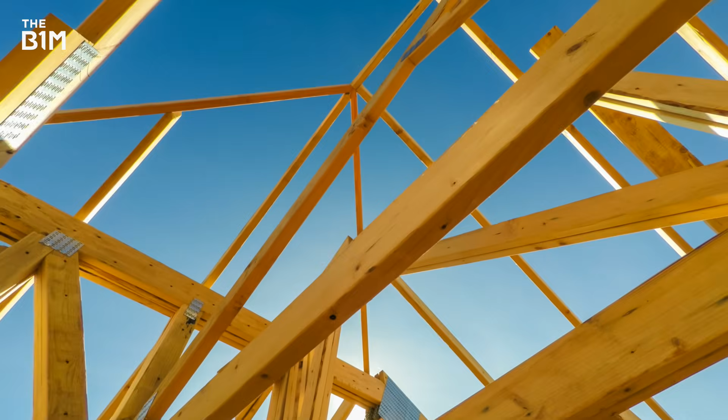Thousands of years after it was first used for building, timber has evolved into one of the world's most versatile construction materials. From soaring towers to Olympic venues, the boundaries for what's now possible with wooden structures are being constantly redrawn, and the trend shows no signs of slowing.

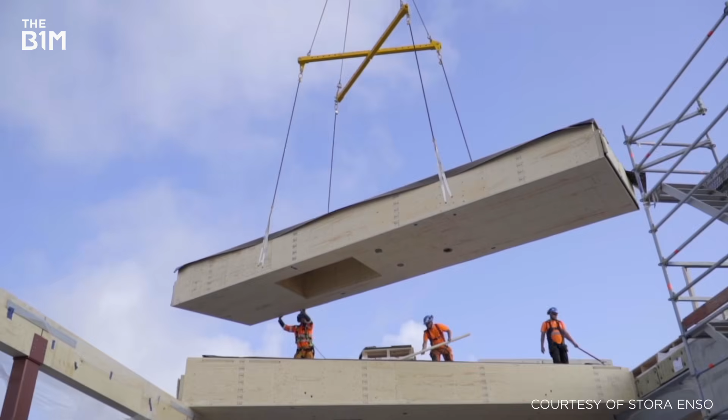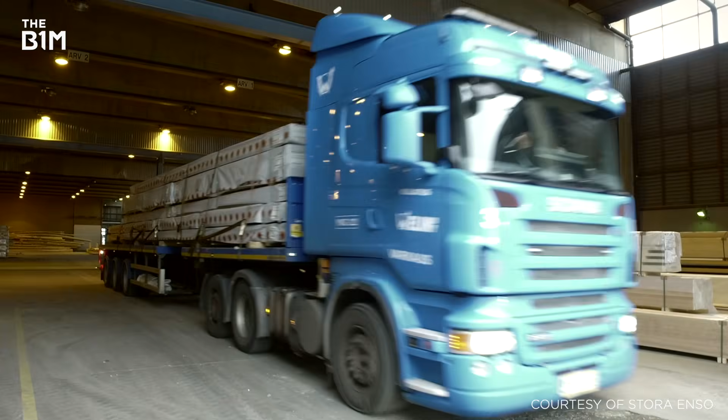But one team in Finland has taken things to a different level. Drawn by the material's benefits and backed by cutting-edge technology from Solibri that enables them to de-risk the project and get right first-time wooden elements from the factory to site, they're now building a new district of Helsinki in timber, and quite literally taking wooden construction in the country's capital to new heights.

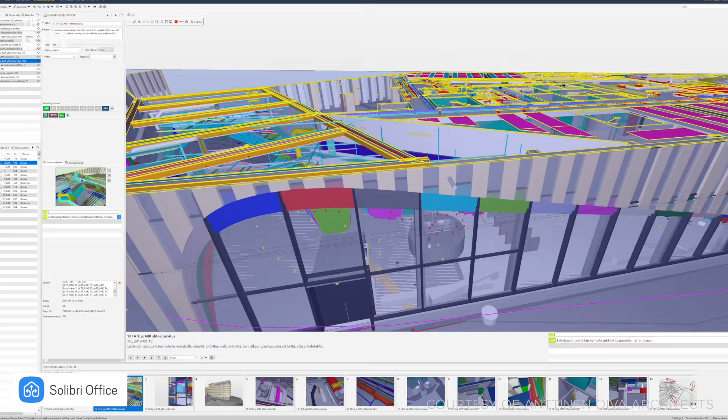With almost 3/4 of its land covered by forest, Finland's long tradition of building with timber dates back to the 16th century. While this was largely limited to housing, a recent relaxing of regulations around multi-storey wooden structures, along with new innovations in wood manufacturing and digital technology, has made building tall with timber an irresistible prospect for developers.

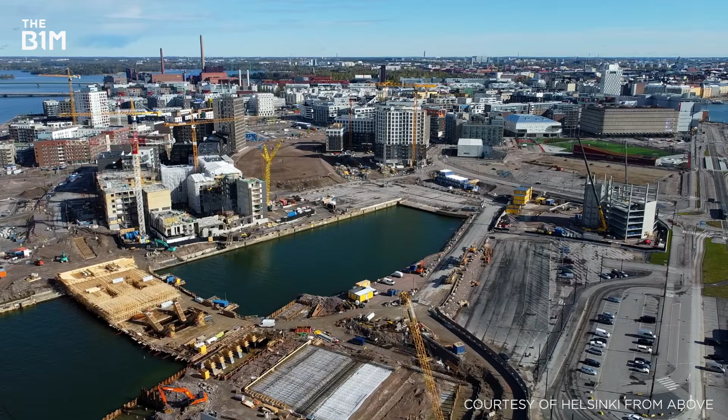Those changes, combined with high demand for workplaces and apartments in Helsinki, have given rise to Wood City, a new district on one of the city's former container ports that is being formed almost entirely with timber. As part of the redeveloped Jätkäsaari quarter that is set to house 17,000 residents and create 6,000 jobs, Wood City combines Finnish wood construction with sustainable design.

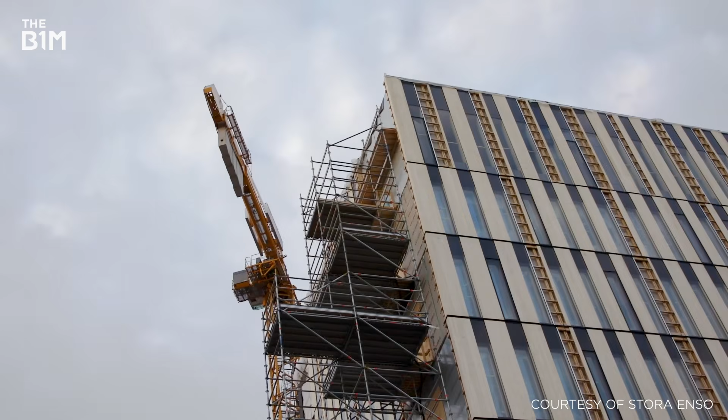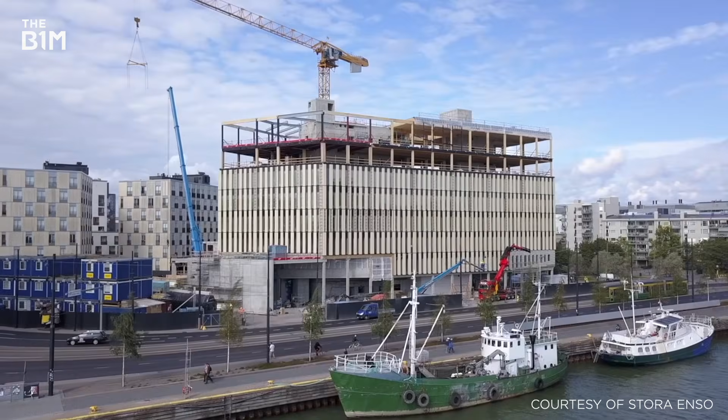Its first structures, twin affordable apartments for the Helsinki Housing Production Department ATT, are already built and inhabited. Next to complete is a new office block for the gaming company Supercell, followed by a hotel. Each of the main buildings rises to 8 stories, with frames and facades made from solid wood. Concrete is only used for the 2 cores of the office building and up to the first floors of the apartment blocks.

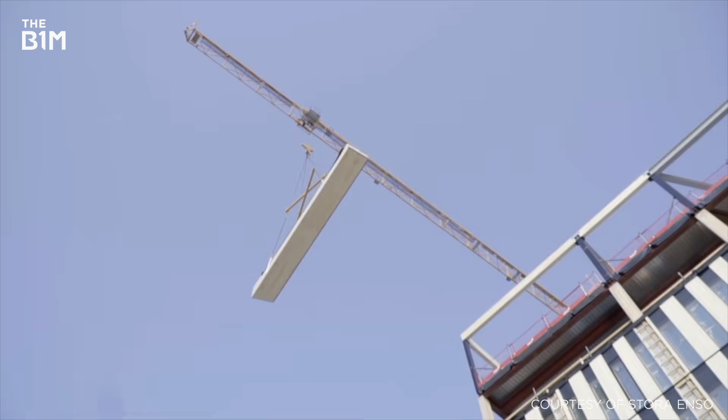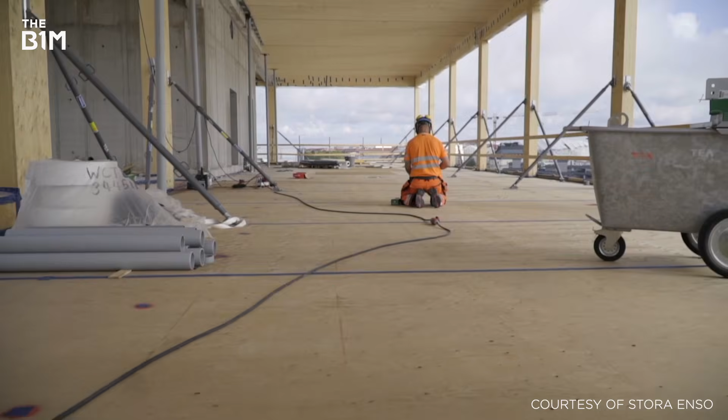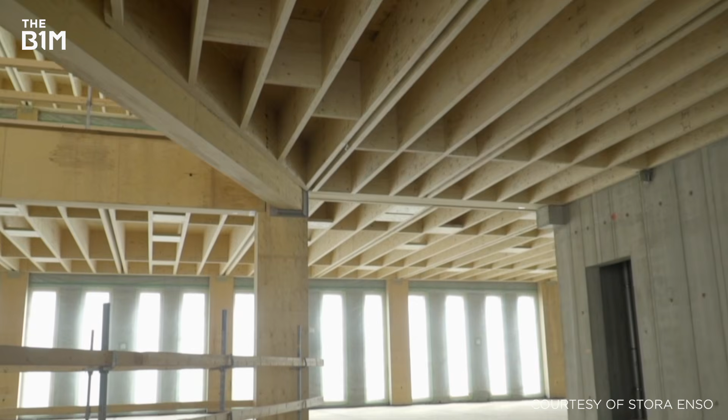Developed by Finnish construction company SRV in cooperation with Stora Enso, the largest supplier of wooden construction material in Europe, the new offices at Wood City are being built using so-called massive wood products, mainly laminated veneer lumber, or LVL. According to Stora Enso, LVL is the strongest wood-based material relative to its weight, and is engineered to be relatively stronger than steel and lighter than concrete, while remaining workable and durable. At Wood City, LVL forms the load-bearing structural systems. In the apartment blocks, Accoya wood has been chosen for the facades, while spruce panelling can be found on the balcony interiors.

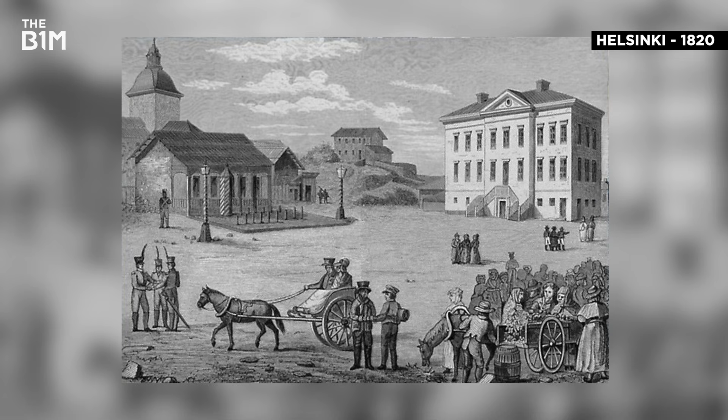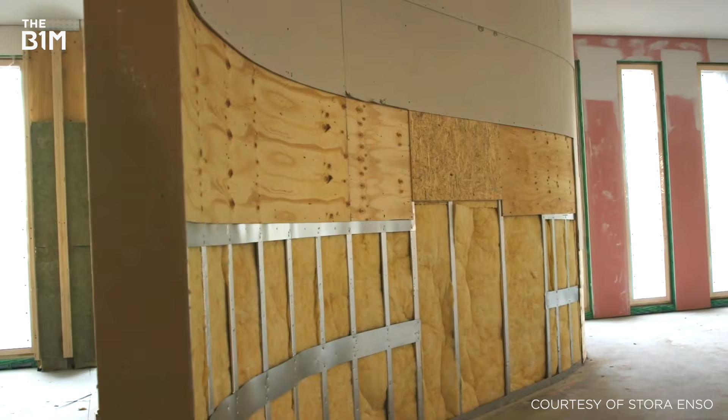Helsinki's history with timber hasn't been an entirely happy one, and major fires destroyed large areas of the city around once a century in the 400 years up to 1900. But history is unlikely to repeat itself. Fire retardant treatments are used throughout Wood City, and LVL offers higher fire resistance than traditional beams due to the structure of the material, which is less porous, with the veneer arranged in multiple layers.

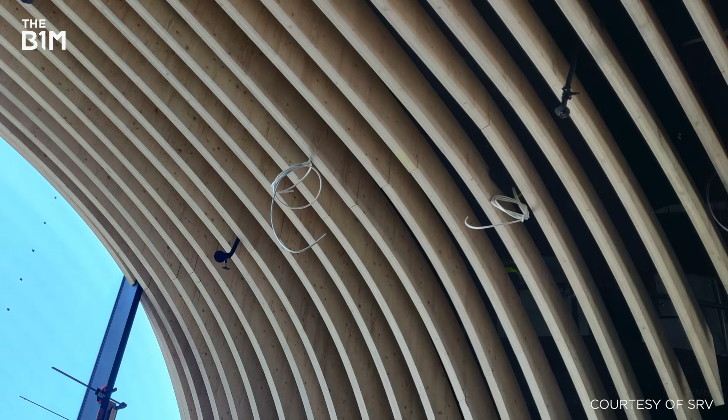Wood also has a lower carbon footprint than concrete or steel, and can be used to build quickly without the need for weather protection. Its visual and acoustic attributes are ideal for living and working environments, and exposed wood surfaces will feature heavily in the Supercell offices.

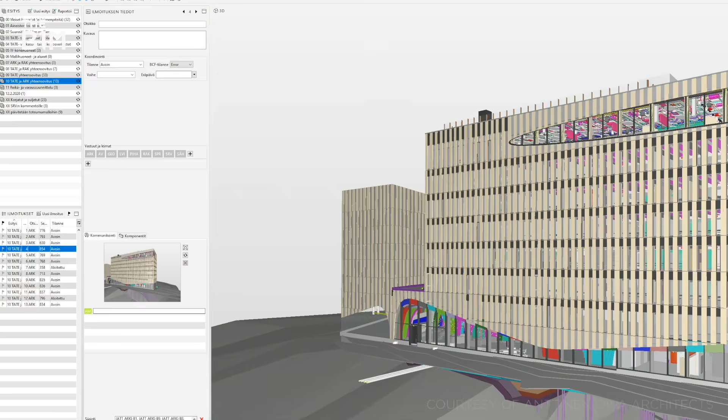Faced with designing a major new district with all of its timber elements prefabricated under factory conditions away from the site before being transported to Wood City for installation, Anttinen Oiva architects embraced digital technologies. Accuracy was key, and the project team worked in an information modelling environment, effectively building the city virtually before construction.

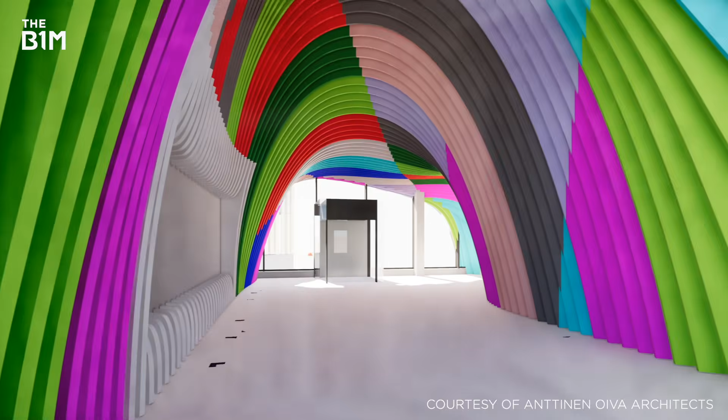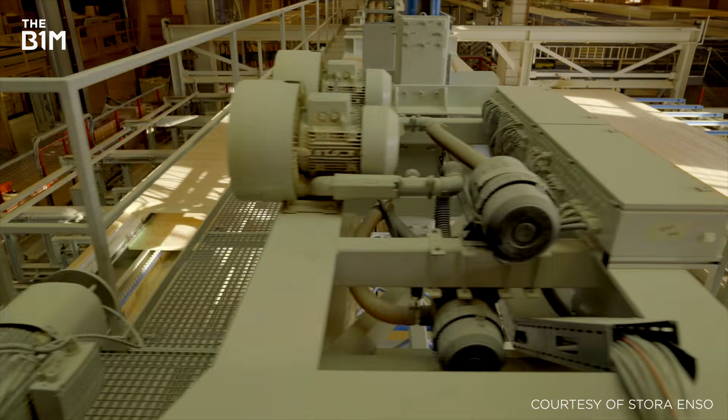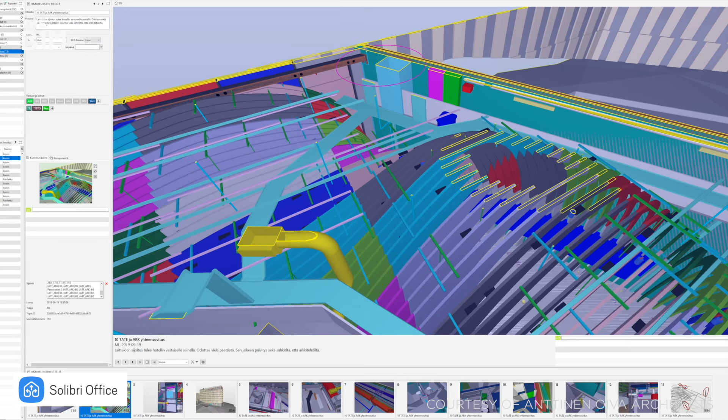The undulating, cross-laminated timber ceiling in the lobby of the office building was especially complex, and had to be coded using detailed algorithms to create diagrams that were then fed to the cutting machines off-site. Timber arriving at site cut to the wrong size or shape could seriously slow down construction, costing time and money to sort out. To avoid this, the team de-risked the project by checking their virtual models in Solibri. The Helsinki-based software firm's platform allowed the team to combine and coordinate their virtual designs, closing out any errors before timber cutting began.

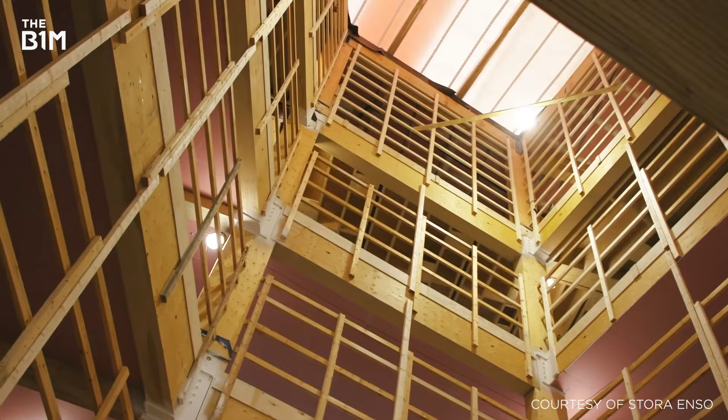Solibri Office gave designers the ability to overlay and compare their models, discussing issues and maintaining the flow of construction information to the factory, while Solibri Anywhere meant that any party working on the project could access the data they needed, wherever they were. Used in almost every meeting between the designers, the software is a critical element of their workflow.

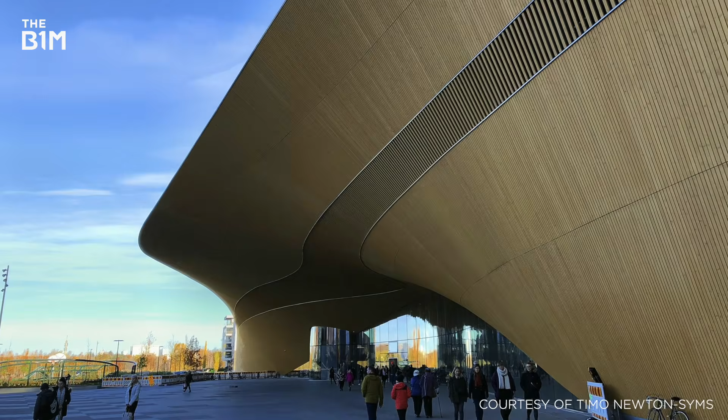With construction advancing, Wood City is already a striking feature in a city known for its diverse architecture. Now joining other wooden landmarks across the country, such as Helsinki's Central Library and the Lighthouse Joensuu, this impressive project shows that timber building is back in Finland, and that this time it's here to stay.